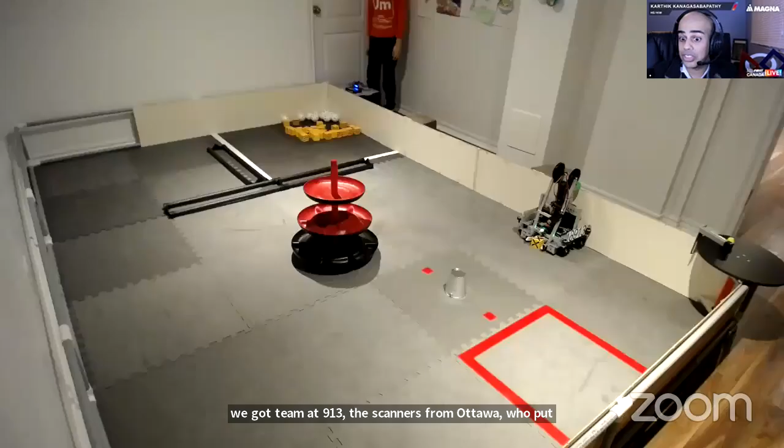Let's get to the most exciting part of all of this and take a look at some match videos. Up first we've got team 18913, the Iskanders from Ottawa, who put up a high score on the season of 162. Let's take a look at this match. Lisa, why don't you tell us a little bit about what's going on here?

All right, so they are in auto. That piece, that block, is called the cargo, and they scored it on the middle level. If you look at the bottom you can see there's a cone thing covering one of those squares, which gets them more points for putting it on the middle level in auto.

Is that literally like a bucket they have on the field? Yeah, pretty much. Oh hey, where did the duck go? Quack! Yeah, so they spun that duck into the field and were able to pick it up, and they scored it in the top, which is amazing. That's 2 scored elements in auto.

Okay, it looks like we're coming into teleop now. Yep, let's watch them. I love their driving, it's just so smooth, and you can see as they're backing up they raise their arm at the same time to decrease how much time they need for their cycles. They've got a Mecanum drive, so they're actually going sideways with the robot, which doesn't always happen.

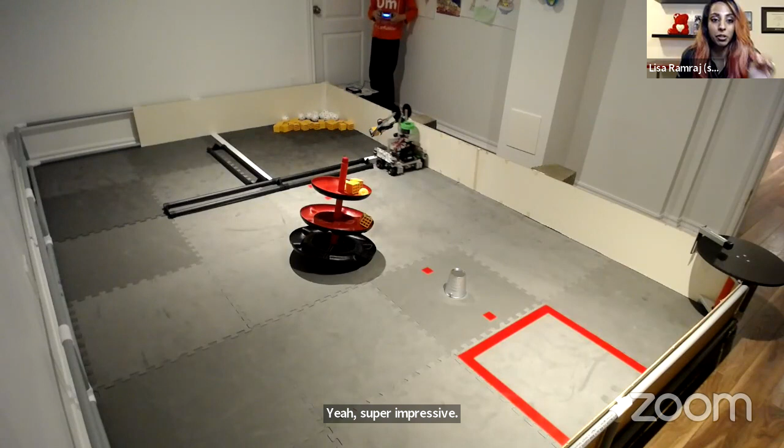So, super impressive, and the cycles are very methodical. You can tell they practiced this over and over to get it right, to score the most amount of game pieces as possible. Fantastic stuff, and they're cycling so efficiently.

I'm not even kidding, all of the videos I watched of this team, this is what they're doing, though some are just more perfected than others. You can tell they practice this, and as we know, once you build the machine, you need to practice and perfect your gameplay, and that's exactly what they did here.

Lisa, this looks like this is someone's house, right? So there was the flexibility for teams to build a field in whatever kind of setting, and they could build a field in a lot of different ways. Yeah.

Did you see that? I think they were going for the top, but it happened to fall in the middle. So they still scored that piece. Now it's the end game portion where they have to deliver as many ducks as possible.

Quack, you're gonna love this. Everyone listening, Karthik's gonna do that every time a duck hits the floor. Hey Lisa, we got a question in chat wondering if the driver might be using a PS4 controller. I have no idea, but it's possible to use a PS4 controller in FTC. I believe so.

That's a lot of ducks. And they got back to their warehouse - I should know the name of this, but they got back there. That's extra points, I'm blanking right now, but that's extra points. So they got back there, they're secure, they're fully in. That's amazing. Well, that was a fabulous match there. I think that's the kind of excitement of it - there's a solid mid game, solid cycling, definitely tangible autonomous mode, and of course the end game with the ducks and everything.

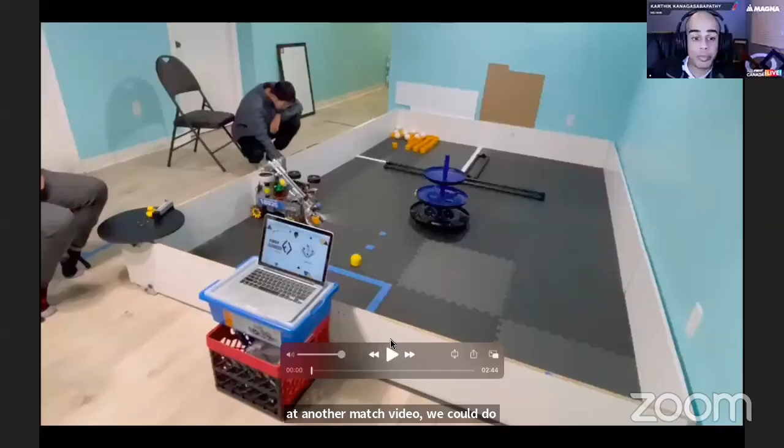Okay, that was a lot of fun. Do you want to take a look at another match video? We good to do this? I do. All right, we got this match video from team 18920, Robotic Storm from Richmond Hill, Ontario, who put up a big high score of 179. Hey, we got a quack in chat. I love it. All right, let's get this started now.

Let's go. All right, so you can see their little hat is on the bottom level. Is that a Lego head? A giant Lego head they use as a hat? I think so.

Wow, and so they went to score, then they delivered the duck, and then they went to get another piece of cargo. And check this out, they're gonna score it before time runs out. There's the telescope you were telling us about, and then they go straight into getting themselves set up right away to pick up another game piece. That's so efficient, I love it. It's a really nice little field they got set up there with the hardboard.

This is good, yeah, highly recommend. To make this season as accessible as possible, it wasn't mandatory to put a field perimeter around, but it's definitely strategically advantageous to have it, because then you can line up against the wall - the classic autonomous mode of lining up against the wall to straighten yourself out.

Just a reminder out there, it's team 18920 Robotics Storm out on the field from Richmond Hill, Ontario, and look at them cycling back and forth. This is some really good driving. I really appreciate that these teams are taking advantage of the Mecanum drive and going sideways with it. Mecanum is very popular in FTC, it's much more viable with the motor power available now. That's really cool. I'm impatient, I'm ready for endgame, I just want some more ducks.

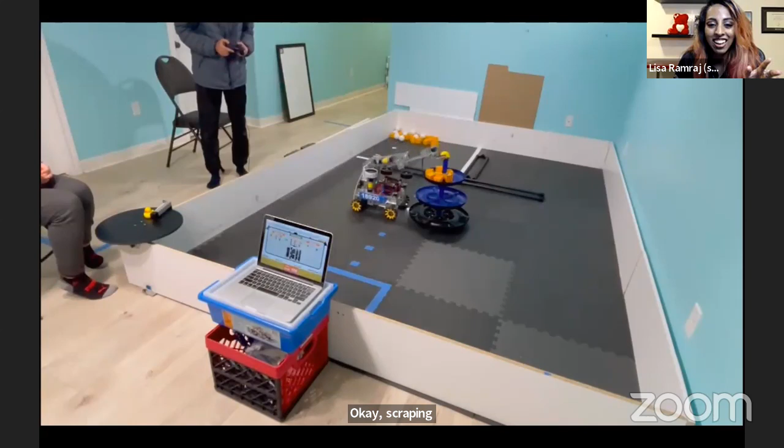Check this out, okay I'm watching. Watch, okay, strafing. And oh, they capped it, the topper! Nicely done, okay now we're getting to the good stuff. All right, here we go, come on, spin that, come on. Quack.

You can see some teams decided to put the duck closer to the center of the wheel, and some of them put it further away. It feels like it impacts how fast it goes, and then they get their extra points in end game before the timer goes. I love that in their video they had the timer, so you could see there was like 2 seconds left on the clock, and they made it back. It was awesome. I appreciate the driver who just like, yep, we're good here.

In FTC, there's other cool things that teams have to do, and one of them is they can submit a video of their control system for the Control Award. We actually have a Control Award video from team 19523, Keone from North Bay. Michelle, is that your team? Yes, it is. Here we go, let's take a look at Keone.

Oh, so this is their autonomous mode, right? Michelle, tell us what's happening here. This went through a lot of iterations. Most of this was already done by the time I joined the team, but our programmer... did anyone else see the colors go weird for a second? Anyway, it's already over, autonomous mode is so fast. That's one of the challenges with autonomous mode, you have very little time to try and do a lot of things. But that's actually kind of cool, Michelle, because it shows just how fast it is. Humans can't get a full thought out in autonomous mode, but you've got to make your robot do it. I saw them do 4 distinct tasks there, so that's really neat, and the teams have to document it like that.

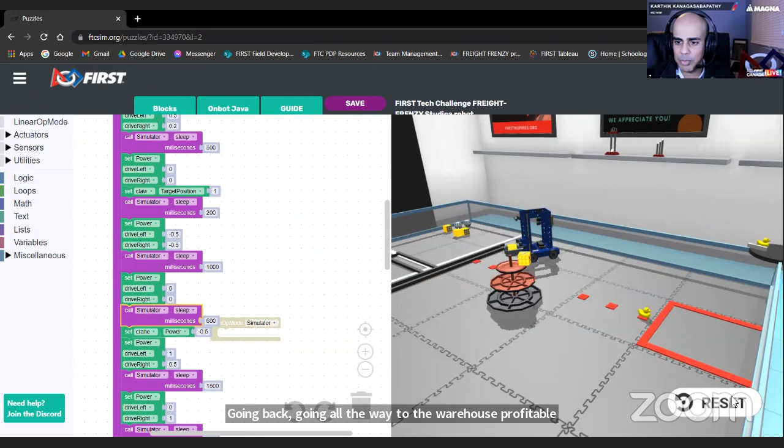Anyway, so I was playing around with this to put all the code in, and after I scored, I was like, I wonder if I can go get one of those blocks over there in the warehouse and score it. So I sat here and entertained myself, and I added this code. Now you're gonna watch me score another block. Here's the original one - there you go, going up for the drop, boom, going back, going all the way to the warehouse, grabbing a block. Let's see if they can do it in time. Coming back, curving around the backside and dropping it into top level. Bam, shalam, nicely done.

And it's actually really cool - if I ran into this, the blocks would actually shake.

It's possible for them to fall off, since it's simulated physics and it's not going to react. See, did you see that? Did you see how it fell? I did not do anything. That block actually fell. Sorry, there go the points. There go the points. It's all messed up.

So essentially what I have to do is, before I let go, I actually have to drive closer to it to make sure that it actually stays on, which I absolutely love.

I'm going to save this for a second and go back into it. Leave this, just going to go back to the main area. If you go, this is like FTC Sim's main webpage. If you go here, FTC 2021, there are actually 3 different fields. So like I said, there's the class pack field with the REV Class Pack robot, there's a competition field with the Rev class pack robot, and there is the competition field with the Studica robot.

So amazing, we could probably dive deeper into FTC Sim and talk about it forever, but we do have other stuff to get to. But Lisa, how do people learn about FTC Sim? How do they sign in?

You can go to FTC Sim, ftcsim.org. Hopefully we can put it in chat, and you can make an account. It's free to sign up, and you can start from scratch or go through the tutorials to build up your skills in the puzzles.

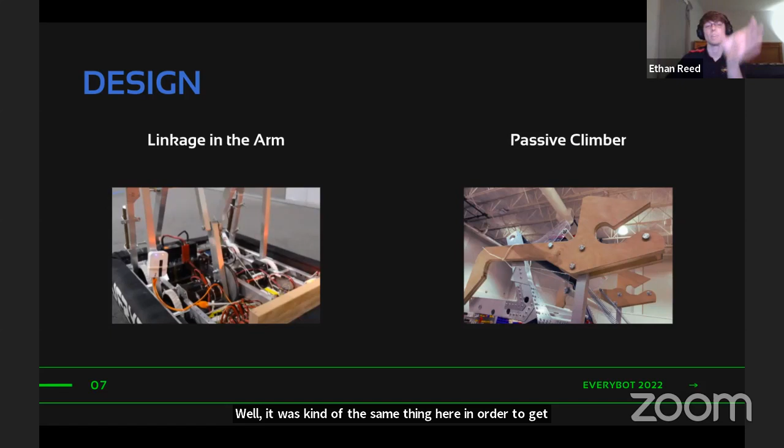Yeah, so we took it from there were some VEX robots a couple years ago in Tower Takeover and VRC where everybody pretty much had that linkage in order to get that pivot point as far forward and as low as they could. Well, it was kind of the same thing here. In order to get the intake geometry to come up and not swing too deep into the robot where you'd have to shoot the balls too far, we needed the pivot point really, really far back.

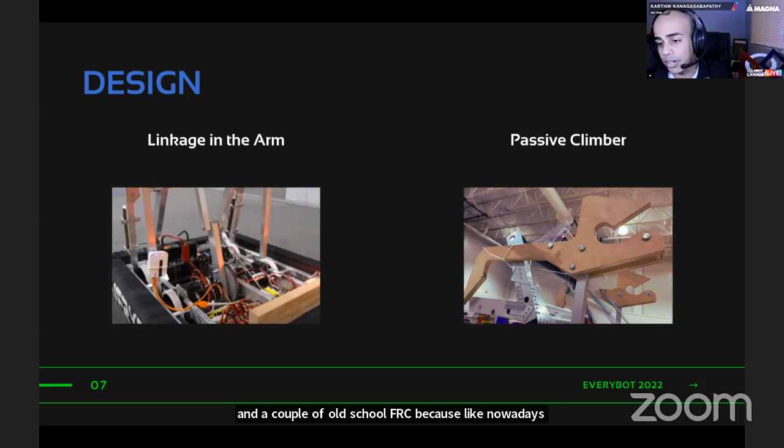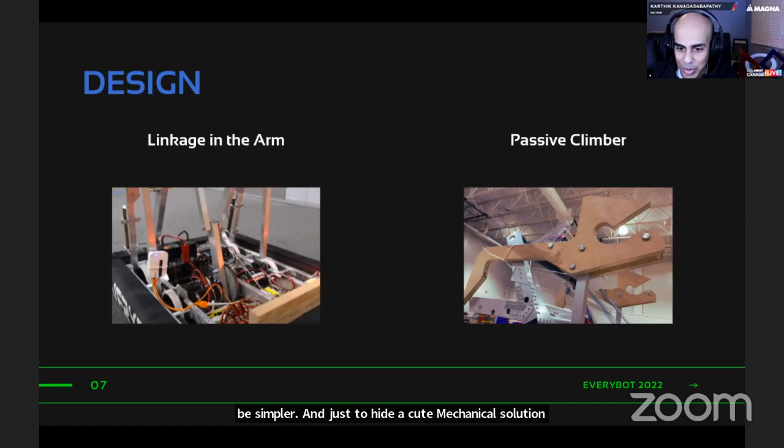So we put it all the way back there and used the over center, and that's a bit of old school FRC. Nowadays everyone's just going to say, oh yeah, there's a PID loop and this control or whatever. But sometimes you don't want software to solve the problem, you want it to be simpler, and just find a cute mechanical solution with a couple pieces of box tube. That is so smart.

And we haven't even gotten to the passive climber, which I think someone's going to talk about. Yeah, so the passive climber, we were really excited when we figured out this works. We knew we could build something like we built in 2020, the PVC extending hook, and that was pretty simple, but this is even simpler than that.

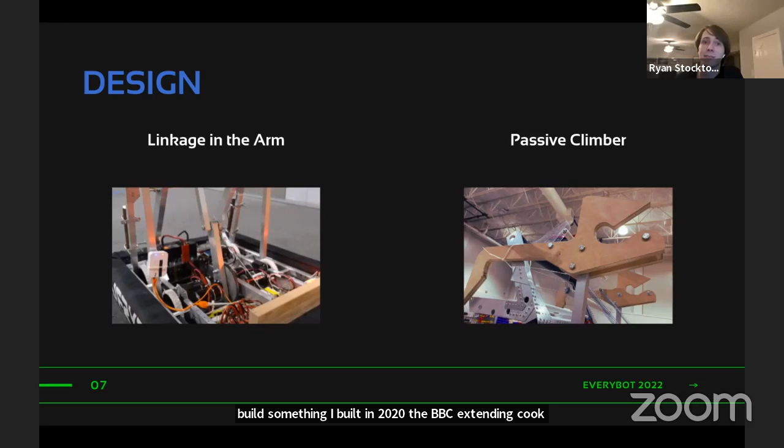So in the robot reveal, we said we will climb on the mid rung. And people were asking us, will you climb on the low rung? We said, well, strategically, we don't think that's as important as the mid rung, but if it comes for free, we'll do it. Well, it came for free. We were able to integrate it all into the same piece of wood, the same mechanism.

So if you drive the robot one way, it clips onto the low bar passively. And if you drive it the other way, it deploys the hooks when it hits the low bar and climbs on the mid bar. Someone asked in chat, what happens if you deploy them mid-match? Well, if you drive through the low bar and deploy the hooks, say you're getting a piece of cargo that's underneath there, when you drive back out, the hooks just stow again. So you're able to extend in that zone and it stows the hooks again whenever you drive back out of the zone. That works out pretty well for us.

So to be clear for the audience, it's not a one-time release like many endgame mechanisms have been for many teams in the past. This one will just go back down. So that's super smart.

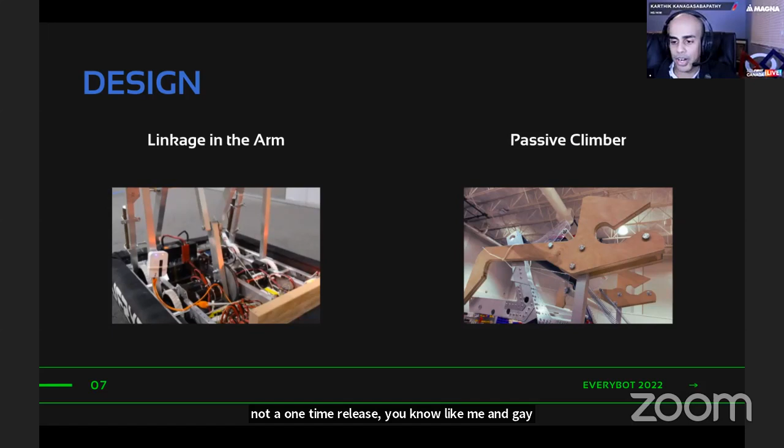Yeah, so one of the things in the bill of materials, which is somewhat pricey, is a big stick of steel. This is used to tune the center of gravity so the robot doesn't touch the ground when it's hanging backwards in the low rung configuration or forwards in the mid rung configuration. Teams don't have to buy that big chunk of steel though, they can use anything heavy they have laying around that fits in the back of the robot. We think pennies might actually be the cheapest option if you're in the United States to get that much weight, but we did not put that on our robot.

Just throwing that out there. It'll be hard in Canada because we don't have the penny anymore, it's out of circulation. But I do have a stockpile of them for any teams, and I will sell to the highest bidder.

Yeah, so the passive climber, like Jenna mentioned earlier, we saw a bunch of Everybot climbers on 2020 robots, even high goal turret shooting robots from 2020. They were like, well, we'll just put an Everybot climber on there because it works. And we think you'll see something similar here.

Jenna also mentioned cutting them out with a router, giving them to teams if you have a router. We're also going to have one-to-one drawings you can print out, glue to a piece of wood, cut out with a jigsaw and a hole saw. So if you don't have that, don't worry, you can still make them. Yeah, so that's pretty much everything about the climber.

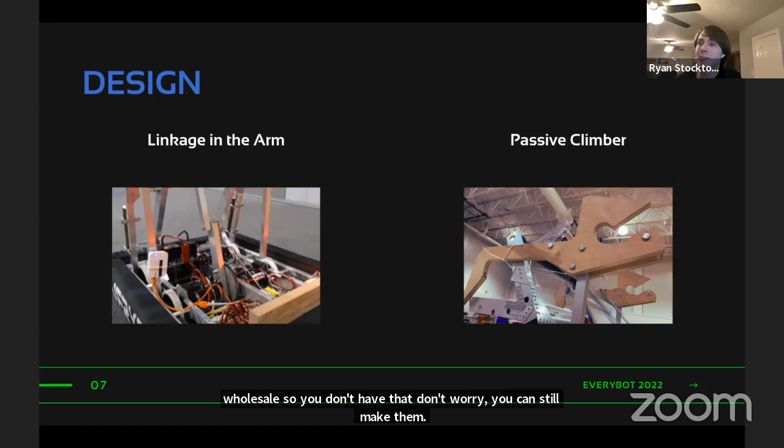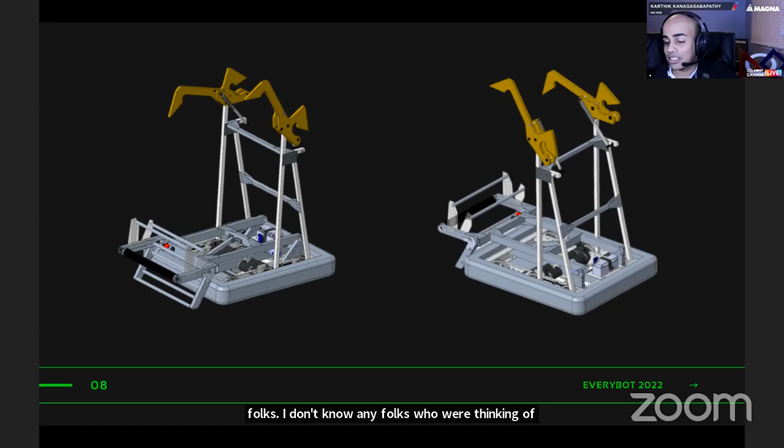The climber is just wild to me because I think everyone has been thinking this season there's an easy, passive, low hang available in this game. And not many folks were thinking of a passive mid climb. So you've unlocked this portion of the game, that's a game changer. And like every season, there are little game changers that happen when teams release things. This is one of them. We're going to see, it just makes so much sense to do it and not drop a COTS, $400 extending telescoping arm that's way overbuilt for this sort of purpose. This makes so much sense.

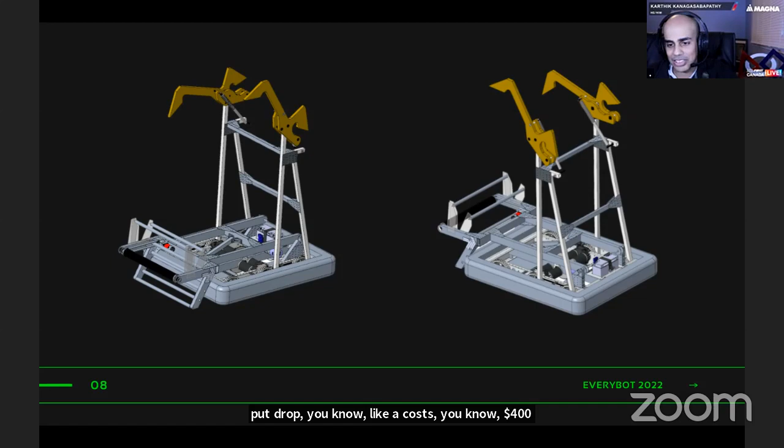I love it. Okay, tell me about these renders.

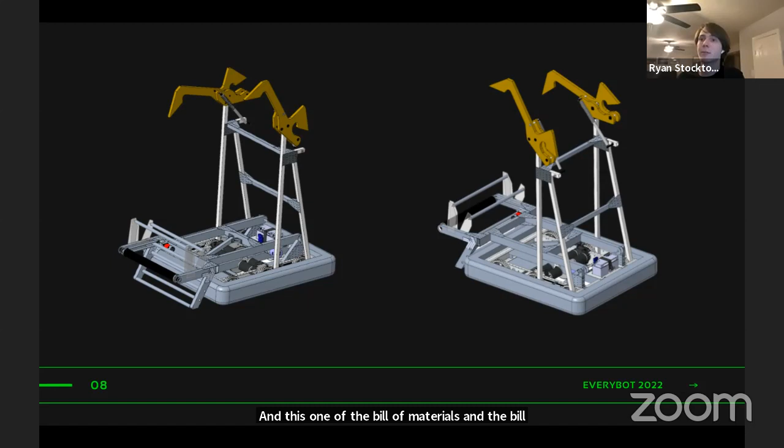Yeah, so this is the CAD of the robot. We try to CAD the robot every year in as great of detail as possible, so that teams can either use this or use the build documentation. This will be uploaded to GrabCAD right after the show, so even if you don't have CAD, you can view it in their 3D viewer. You can measure things, rotate it around, get an idea for the robot. So it's pretty much as complete as possible. And this, along with the bill of materials and the build documentation we're going to release later in the week once we finish creating it, should allow teams to find out everything they need to know about the robot and its design.

All right, is there another slide? Yes, oh yes, here we go.

So yeah, this is something when brainstorming robot designs, it's something I think about a lot. It's like, what's the floor, what's the ceiling? What happens if you build this robot at the very last minute and just get it to competition, or what happens if you get this done early, have a lot of time for practice and whatever, and what's the range? Because there's some robots out there that have really low floors but high ceilings, because a lot can go wrong since it's so complicated, but a lot can go right. And there are other robots which have things more compressed.

So tell me about what you think the floor and the ceiling is. Yeah, so FRC is really hard. I'd say this year it's even harder than it's ever been because of COVID and teams not able to meet. So the floor most years is to just score game pieces. I think this year it's even harder to do that. I'd say the floor with Everybot is that you can get out there with a functional robot that contributes to your alliance. The low goal in this game is a lot higher than it's been in previous years, and I think teams are going to struggle to even score in the low goal at times.

Hopefully this resource will allow you to build that quickly, the arm and the intake, probably the most important mechanisms on the robot, and just score some points, contribute to the alliance, have fun playing the game. And the ceiling is far beyond that. I am fully convinced that at championships, I want this robot as my third robot, and I'm going for a championship win. I think this robot has a place on an alliance that plays on Einstein even.

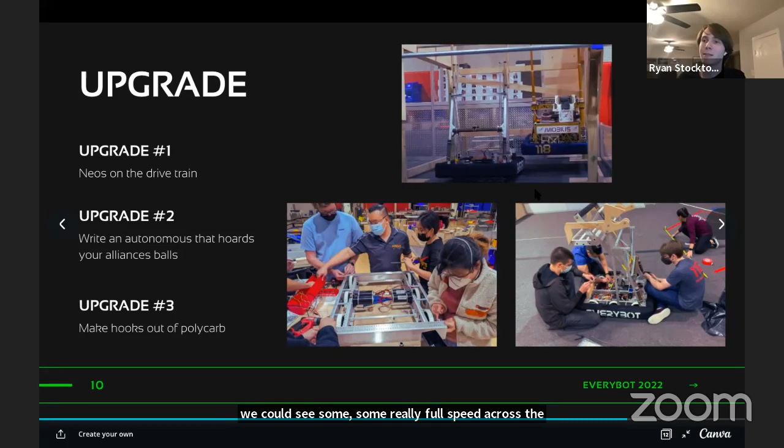Making the hooks out of polycarbonate, probably 1/4 inch, or maybe two sheets sandwiched together, will make it more robust. It'll allow you to be more aggressive when climbing and never worry about the hooks breaking. Like I said, we haven't broken them, but we could see some really full speed across-the-field climbs that could damage them depending on the quality of plywood you're using.

This is also really useful for teams who maybe don't have access to their facility because of COVID, or have to work at home. Maybe a team's dropping off the kit chassis at one student's house to put together, and dropping off a bunch of box tubes to be cut at another student's house. For small teams, if you only have a few members, or you're not allowed to meet in large groups due to local regulations, it's pretty simple to build with a small group. Our Everybot crew is about 8 to 10 people, and it definitely can be built with fewer people now that the design exists and is published. That's how we've done it every year, and we really want to make sure it can be built with very simple tools.

That's amazing, because it plays to the accessibility. All right, thanks for the slides.